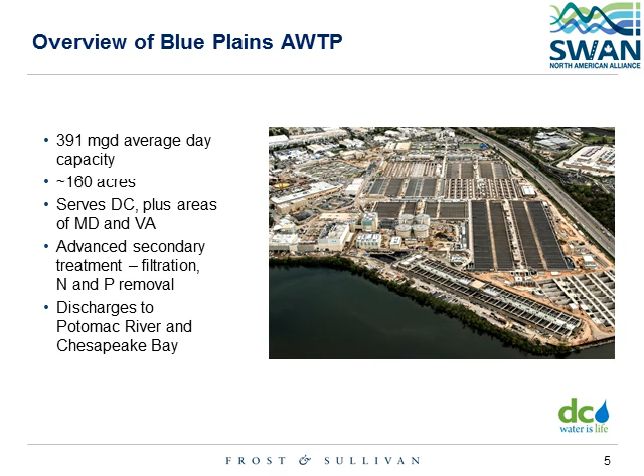Recently, we got in service thermal hydrolysis, and currently we're undergoing a significant expansion including collection tunnels and a treatment capacity for about $3 billion. That's ongoing work on the plant.

So the way I decided to run this presentation was by sharing with you guys a couple of the cases where we have used technologies that we consider smart water, and at the end I'll be sharing with you my conclusions and how we feel so far about this journey, which started approximately 2 years ago. So the first case will be very quick. It's based on our multimedia filters. These are sand and anthracite filters that we use for effluents.

We have about 40 of these filters, and we've been experiencing issues with them, including breakage in the under drains, which for anybody familiar with filters means very expensive reconstruction. We couldn't catch these breakages until they became catastrophic, resulting in bigger spills of media going into spent water wells, which was very traumatic and expensive.

So we knew we had collected data for about 10 years on these filters, since we have a running control system. Everybody's talking about big data, so we asked: what can we do here with this information to help us do things in a better way?

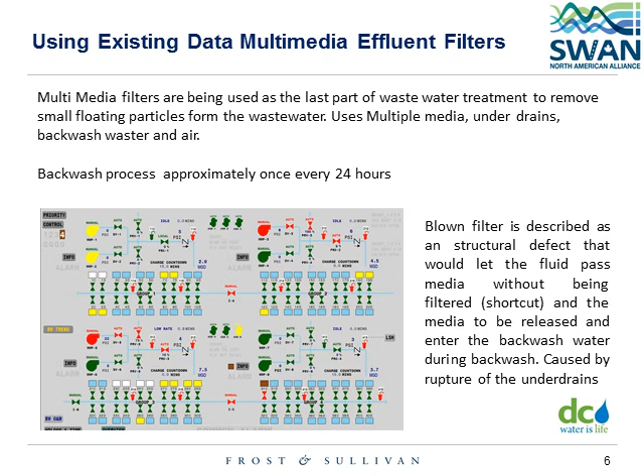So we partnered with the University of Cincinnati to have a data scientist, and we ran an exercise to perform analytics on these filters. What you see on the slide is a quick description of the process. This is a backwash system performed every 24 hours, and we found defects that are basically short-circuiting the filters for practical purposes.

This was our very first try on big analytics. We partnered with this data scientist and went through the different steps of doing data analytics. As we learned, we went to a step of data preparation, in which the data is collected. Keep in mind, this data scientist is not necessarily process savvy, so you have to explain what the ranges mean, what the values mean, how the process works.

Then, based on the information we get on the nature of the process, you perform feature extraction. That could be time domain, frequency domain, or a mix of both. This is where it starts getting a little more complicated. In our case, we came to the conclusion that time domain was enough, meaning we just needed simple means, medians, maximums, minimums, and standard deviations to make sense of the data.

After the feature extraction, we do a feature selection, to understand which features provide value in understanding the process and what can go wrong. This is basically creating signatures for normal operations and signatures for failures, and that way we can perform a health assessment.

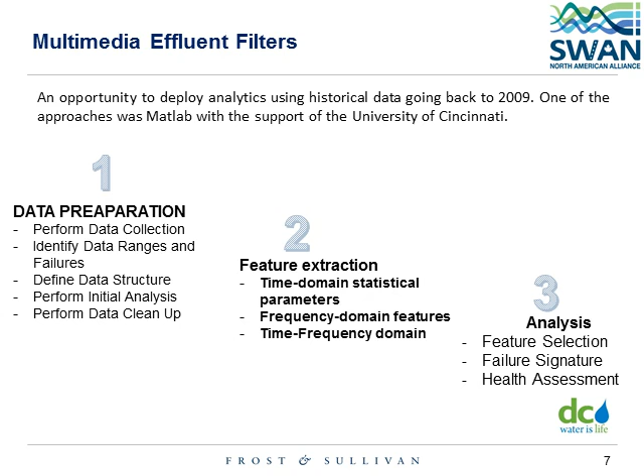The graphics you see in the slides are actual graphics produced from these reports. We got those signatures and analyzed the data in the context of given filters. The outcome was we were able to correlate data like head loss on the filters and backwash flows to at least identify the very moment the filter starts to malfunction.

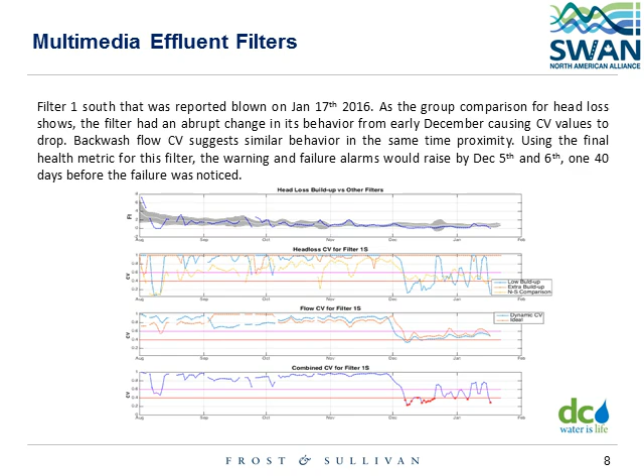So we haven't been able to predict the failure yet, but we've been able to identify it right away, which has an advantage for us because we can take the filter out of service and avoid having to clean up spent water filter wells that would otherwise receive excess sand or anthracite. For us, it's been a successful exercise. Keep in mind the initial goal was to predict the failure - we didn't get there, but we got what I consider a useful result.

Next, this is very simple. On the treatment side, we have a lot of vertical assets, and those assets in some cases are connected to control systems. Traditional control systems end up being very expensive when it comes to monitoring, so you can only justify it on certain high-value assets. If you have a pump worth $100,000, it's very easy to justify having a vibration system, energy monitoring, and so on, because it's an expensive asset - you can spend $5,000 or $10,000 to do this monitoring.

But when you have a lower value pump, say worth $5,000, it becomes harder to justify spending $5,000 to monitor something that's only worth $5,000. So what we've found is there's a big opportunity for new technologies that are inexpensive and very flexible to fill these gaps.

What you see on the slides are actual apps we've deployed to monitor energy out of our RAS pumps - this is an actual example of what's being done. In one case, we're monitoring vibration, flow, temperature, and current. In another case, we're only monitoring current, and those measurements, properly analyzed, can tell you a lot about an asset.

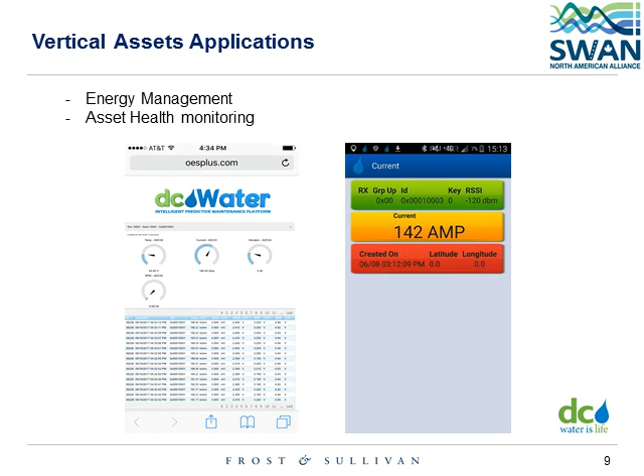Something to note is that we are very early in the stage of smart water, so the options are many, and it's up to the users to try to find out what is more effective.

So what I wanted to do there is give you quickly two examples, and now I want to spend the last few minutes on more of a big picture. So what have we learned so far during this journey?

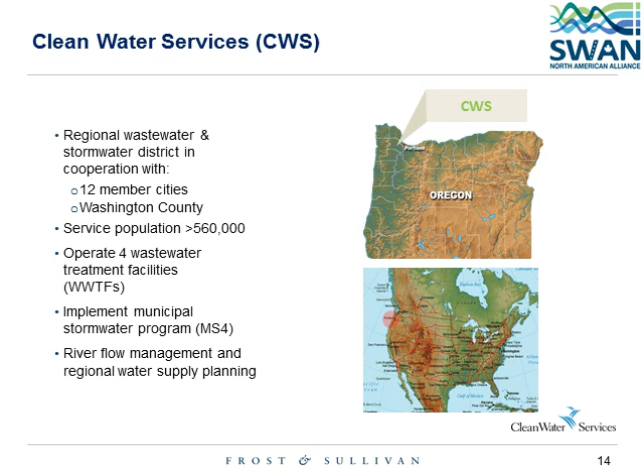So just like any typical utility, the daily operations involve the pumps and pipes and plants, but achieving that watershed health and overall environmental outcome is our Clean Water Services mission. What we have done through innovation is we started the first in the world phosphorus recovery facility here. And in order to advance water reuse, we started using high purity reused water for brewing beer. We also manage not only water quality, but water quantity. All of this is about environmental outcomes, connecting natural systems and great infrastructure to enhance ecological enhancement and quality of life.

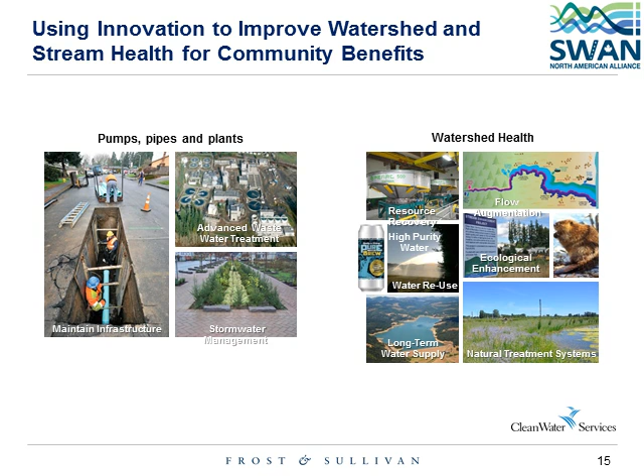So in order to do this, it really requires innovation to push that envelope and achieve that outcome. So today I'm going to demonstrate innovation in terms of smart systems.

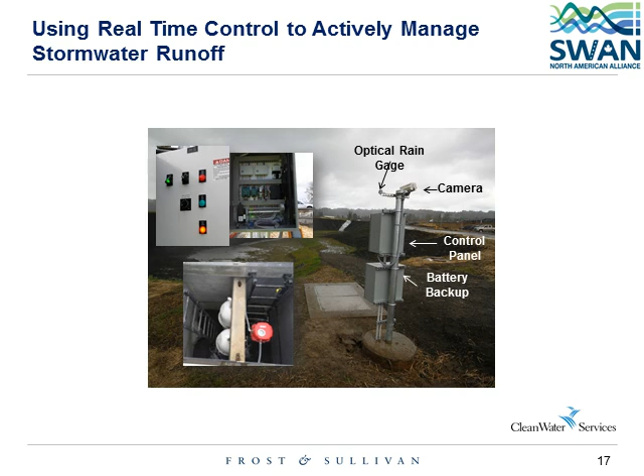The technology involves using weather forecast data and also rain gauge data, which goes into the cloud for communication and analytics. We work with OPTI and Geosyntec, and there are on-site sensors such as water level sensors, real-time cameras, and the valve that can actively control how much water is releasing to the pond.

And at the end, you have this end user platform where you can really access real-time data, seeing how much rain is going to come, how much runoff is going to be generated, and what release rate the system needs in order to produce the minimum release so as not to interrupt the receiving streams.

Here is a performance hydrograph for a rain event that happened in May last year. The green shows the peak rain event, the storm event during that time period. As you can imagine, the inflow really mimics what rain is coming in, so there are several peak runoffs that come into this detention basin.

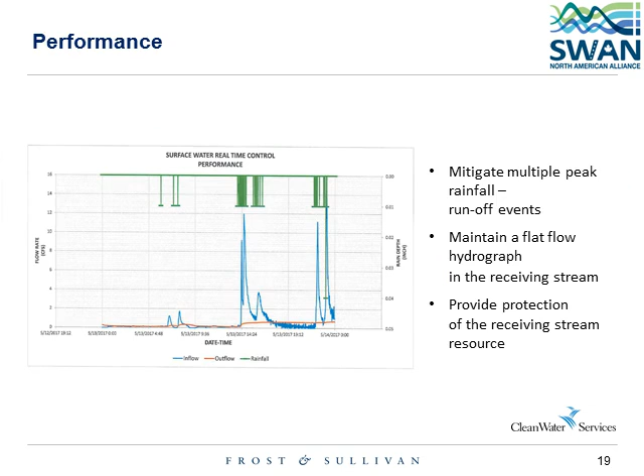But what the smart water system really helps with is calculating how much rain is coming and how much is going to come in the next 24, 36, 60 hours, so it can actively store the water and dampen that hydrograph going to the receiving stream. So even though there's peak runoff coming to the pond, by having this data analytics, the receiving stream receives a minimum, very flat hydrograph throughout the entire rain event, which is very important for protecting the receiving stream and the function of the creeks.

So just to summarize the benefit of smart systems, when you're selecting the smart system, it needs to support the overall mission outcomes. I think we are here not only because the technology is cool, but because it can utilize data and technology to really maximize the capacity of the detention basin in this case, and also improve the environmental outcomes.

That reduce the disturbance and minimize the change of rate that goes into the receiving streams. The second benefit is controlled spending and leverage partnerships. With this project particularly, we were able to work with the developers in the neighborhood. They are very interested in these smart technologies. And because of this active control, we are able to reduce the infrastructure footprint, which translates to the cost eventually. And the third element of the smart system is flexible and adaptive management.

What that means is, because the data analytics are actively looking for how much rain is coming every minute, they are calculating how much storage you need based on the runoff generated, and using an adaptive management protocol for stormwater management, rather than just applying one way of managing stormwater when you have an event.

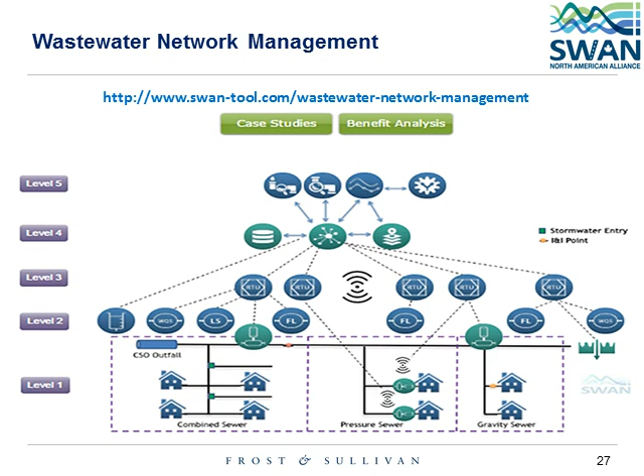If you click on one of these green buttons, like database, you'll get more information about that tool and some things you should be looking at when you start to develop your process.

For example, in the database, it tells you what the function is. The overall goal of a smart system is taking data, creating information, creating knowledge, and being able to take rapid action. This is accomplished through the whole process of collecting it, communicating it, processing it, and visualizing it.

To be able to do that, you've got to have a robust system in place. A database is a key area that requires you to capture data from different streams and store it in a normalized fashion, so you can start to cross-reference that data together to show relationships. The relationships are really where you start to create that knowledge of your system that allows you to take rapid action to prevent failure or problems from arising.

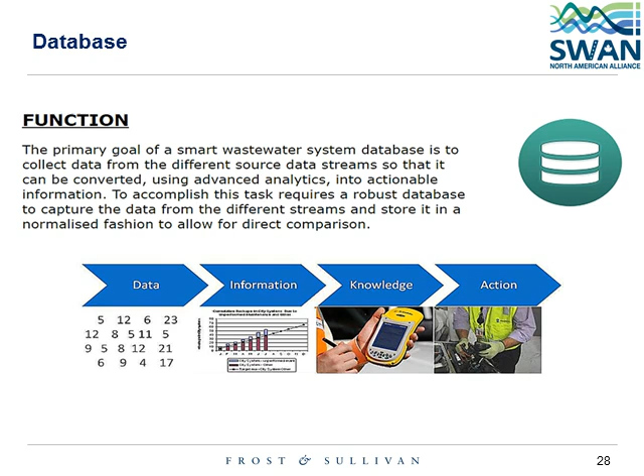The nice thing about the wastewater network management tool, and the water one as well, is we've got a whole series of different case studies in there. For example, four of them, one being the CSO work in Cincinnati, Ohio, where they've been doing a massive program looking at a watershed-wide approach for reducing CSO discharges in their system. You can click on it and get more references and more information about how they've accomplished that.

In fact, they'll be doing a presentation at the SWAN Pavilion workshop at WEFTEC, at a workshop for our WRF project, and then also at the November 6th event. So you'll be able to hear more from Cincinnati about what they're doing in a number of areas.

Optimizing sewer maintenance in San Antonio, Texas using the SmartCover system, long-term control optimization with Optimatics, lift station control and monitoring, some work Xylem's been doing. What this allows you to do is see real proofs of how technology is being used and implemented, and the value that utilities have gotten out of that.

That's really important. We get a lot of people coming up to us saying, I've got this great new solution, but it's never been tried before. I think what we all want to see from the utility perspective is how my peer utilities used it, what's their value, and how can that be applied to the challenges I have to work on today.